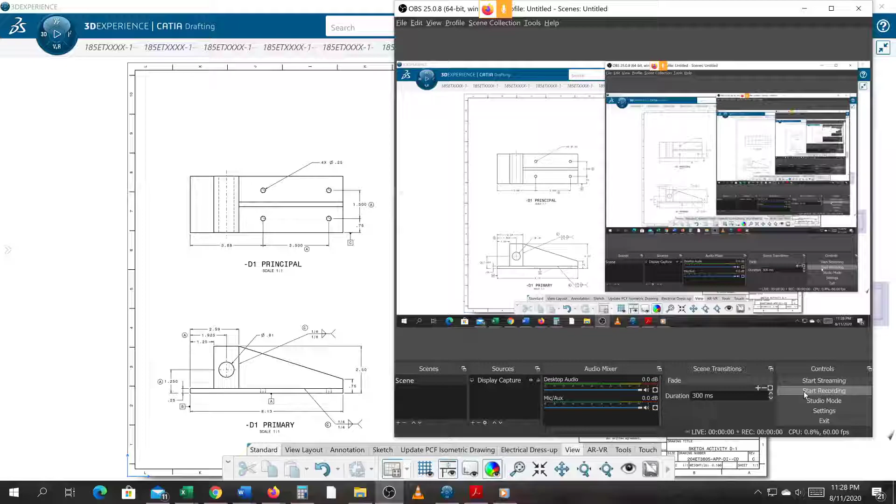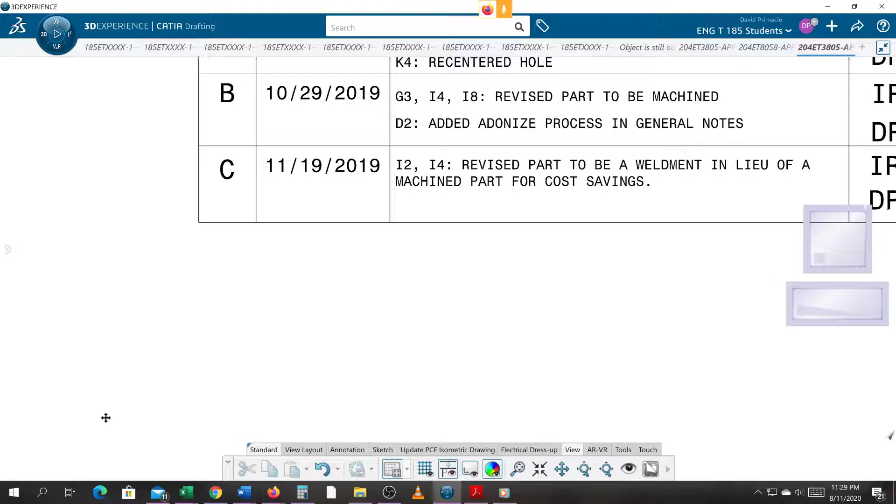After completing revision C, we decided we missed a few things, so we're changing it over to a weldment. This becomes a weldment drawing where we identify parts with a bill of material that would look very similar to an assembly drawing.

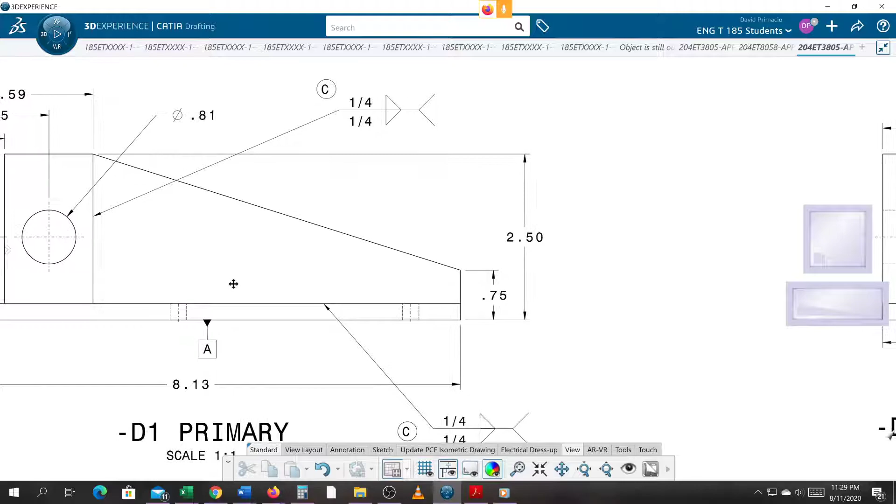So we added the 1/4 inch fillet welds. You've read through the welding section of the book, but normally when we weld something on, we would weld a stiffener or a gusset on.

The gusset would have a flat like this over here, where the 0.75 vertical dimension is. There would be a flat on top as well instead of coming to a sharp point. It'd be a lot easier if we just had a flat gusset coming out here.

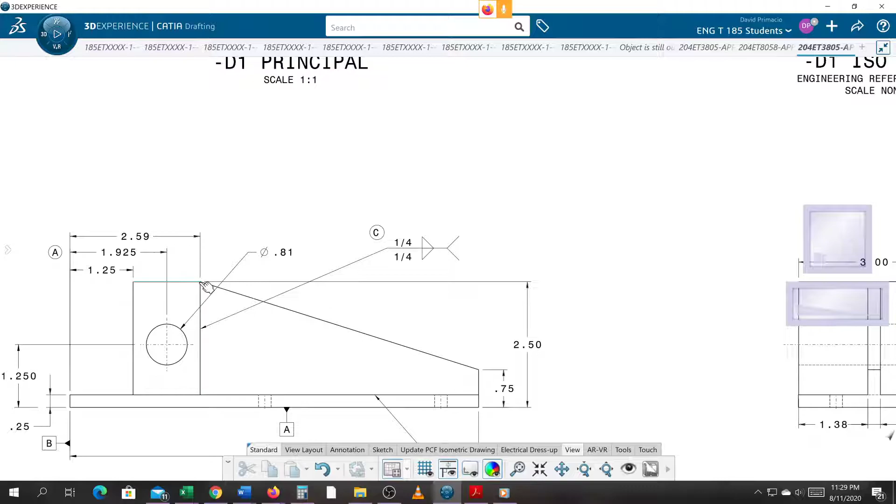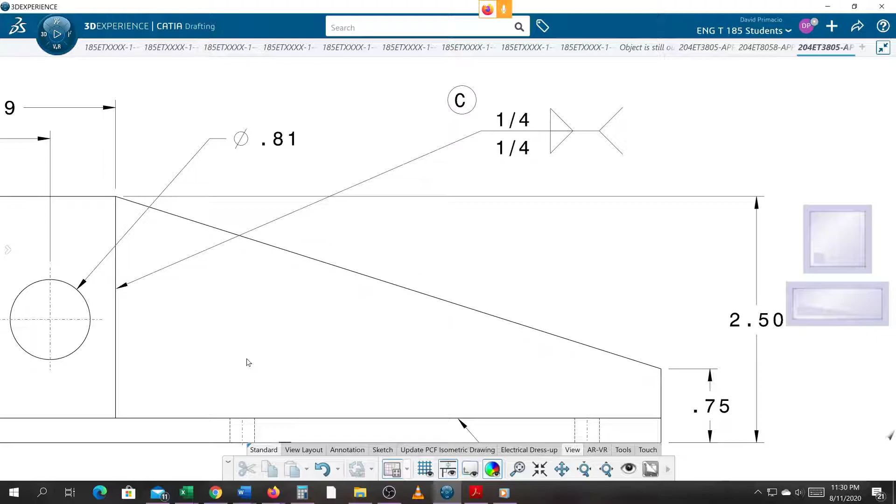Now that means this piece is a welded piece. This gusset welds onto this other piece here. If that were the case, those are two separate pieces being put together at one time, making it a single piece. So unlike an assembly, it won't come apart once we've done the weldment.

So on a weldment drawing, you typically dimension the part and the actual assembly all in one drawing instead of making different detail drawings.

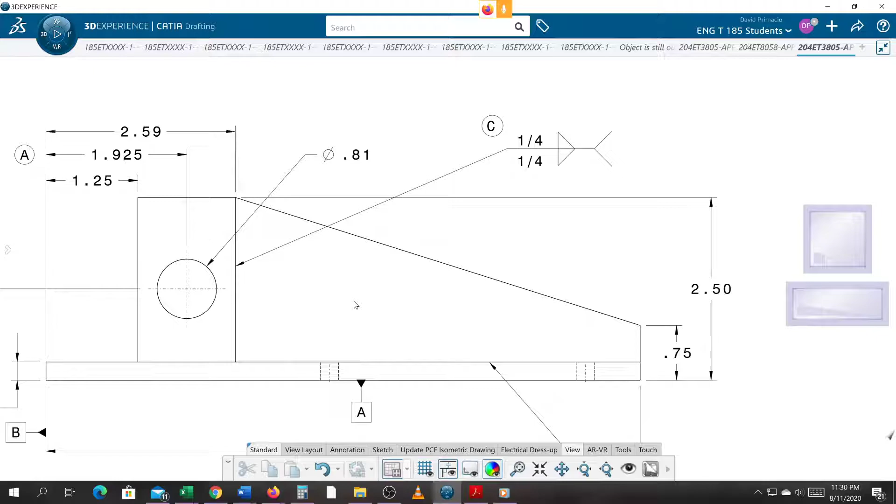So this would become a weldment primary view, and this flat here would be called off, but you'd also have to call off the individual parts. Let's take a look at one.

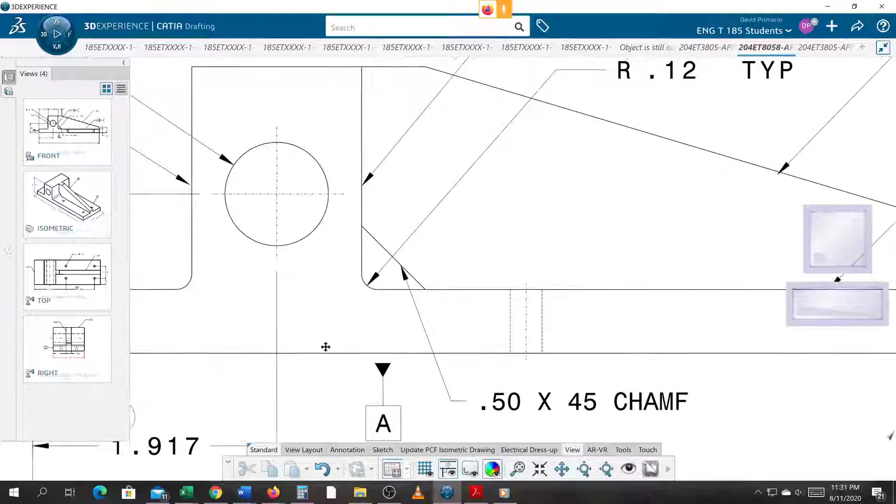You have your fillet welds, which were supposed to be 1/4 inch, and when I go to machine the block on the bottom, the end mill would leave a fillet over here and over here, so you'd have an 1/8 inch fillet in these corners, 1/4 inch fillet, whatever fillets you use.

Now, the only problem is this gusset - if you were to draw that gusset and try to get it in there, it's going to have that square notch and it's not going to fit in the radius. So we've got to chamfer off this edge so we can easily slide this up and fillet weld it on both sides.

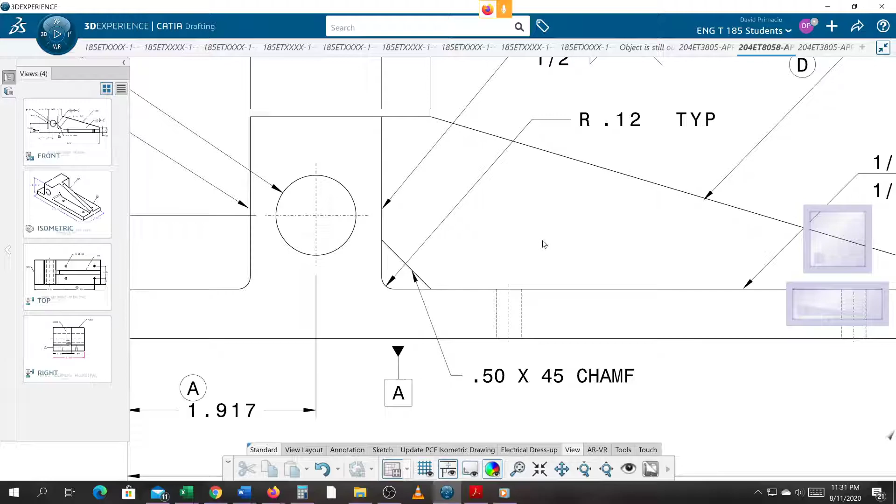So you'll have to add in a chamfer here, radius that part that we're going to machine out, and then weld this stiffener gusset onto it.

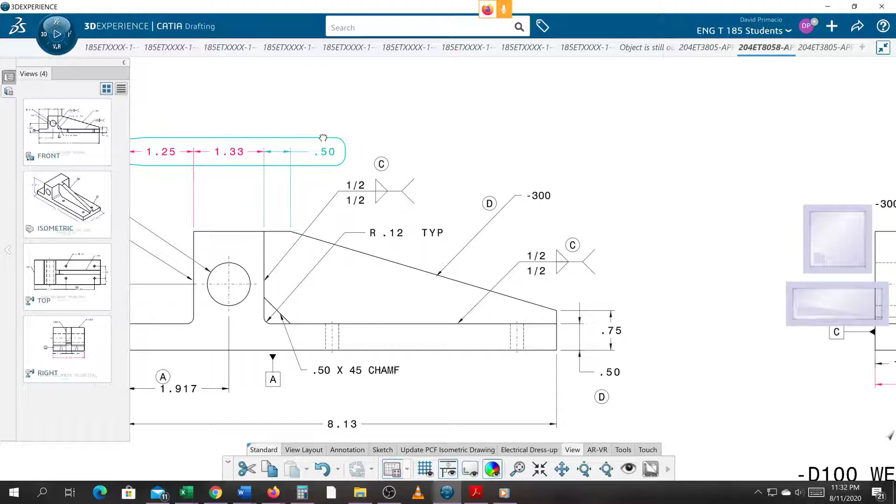This is actually not correct - we want to make this flat up here. That 0.5 dimension here should be the same as that line right there. That should be 0.5 as well. We'll make them equal for a stiffener.

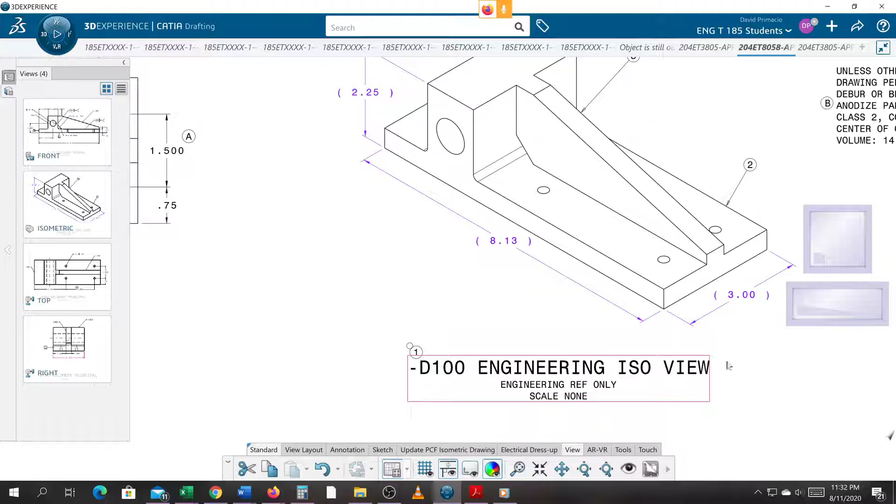And this becomes - let's make this a 100 here, because now that it's a weldment, it's a lot easier to have numbers rolling in and out if you go to the 100s instead of starting at 1 and counting to 10.

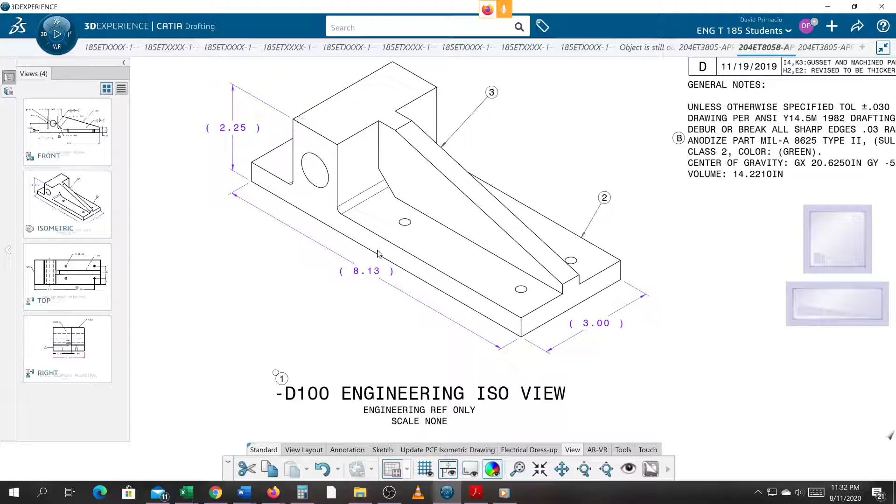So you want to start off with the dash 100 - this is the weldment itself. Then dash 2 will be the base piece, and dash 3 will be the stiffener that we weld onto this with the 1/2 inch fillet weld.

So you want to call out all the changes we're making for the final change to revision D. This general note is supposed to be above the title block. This bill of material is normally above the title block, but I would allow it to go down here below.

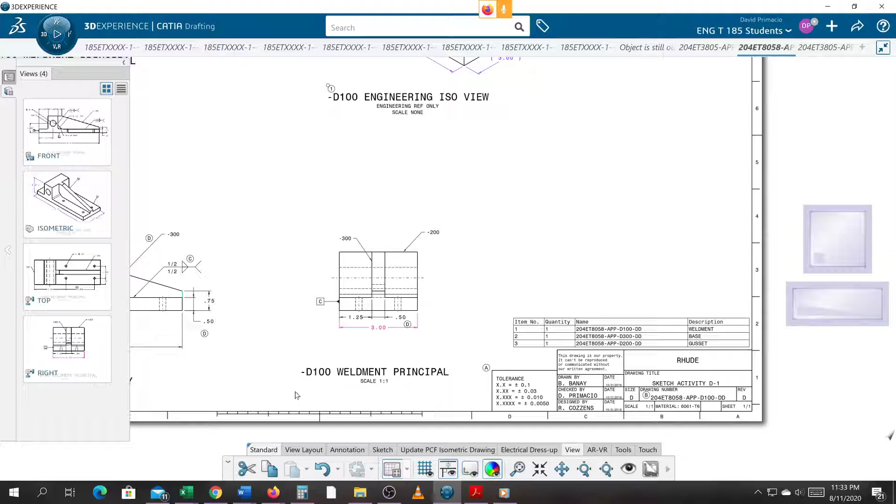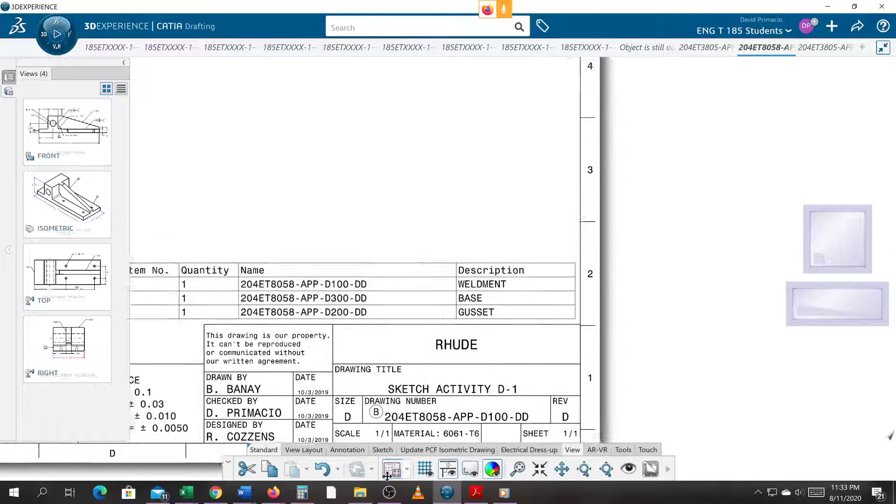This is an ANSI drawing, so if it's an ANSI drawing, we want to make sure we have two-place precision on our dimensions, and we're calling off the parts.

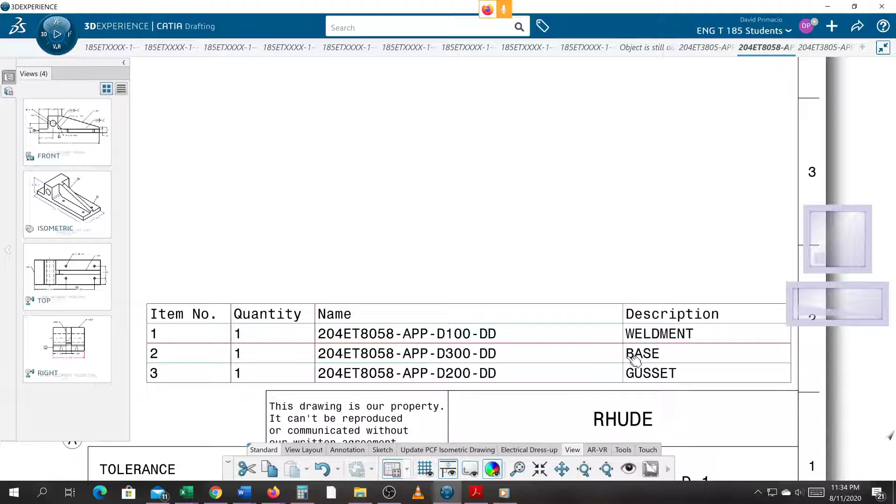So this is the dash 200, the dash 300. The dash 100 is the weldment itself. The dash 200 really should be the base. The dash 300 would be the gusset.

If it labels it that way, it labels it that way. I'm not too worried about it.

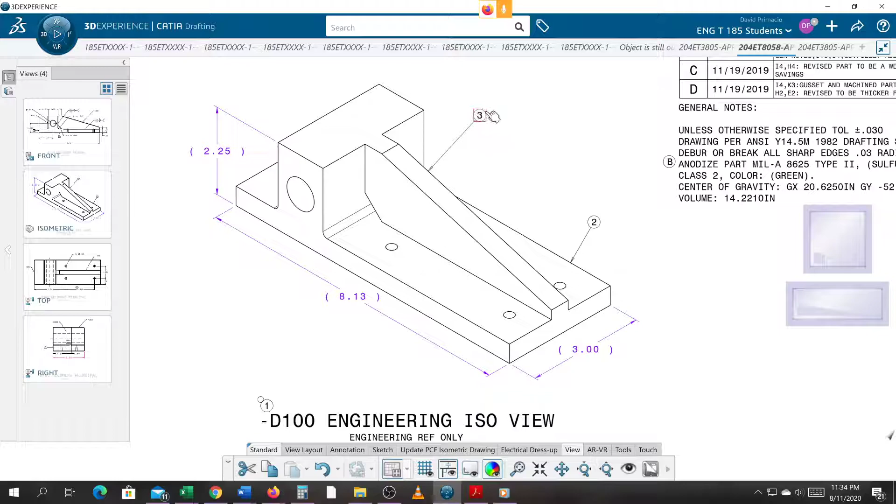So we have to balloon. The first balloon here is for the ISO view, the weldment. This balloon is for your base. This balloon is for the stiffener, which actually didn't look right now that I'm thinking about it.

The base would be the 200, and the gusset would be the 300, because he's calling this number 2, the gusset number 3.

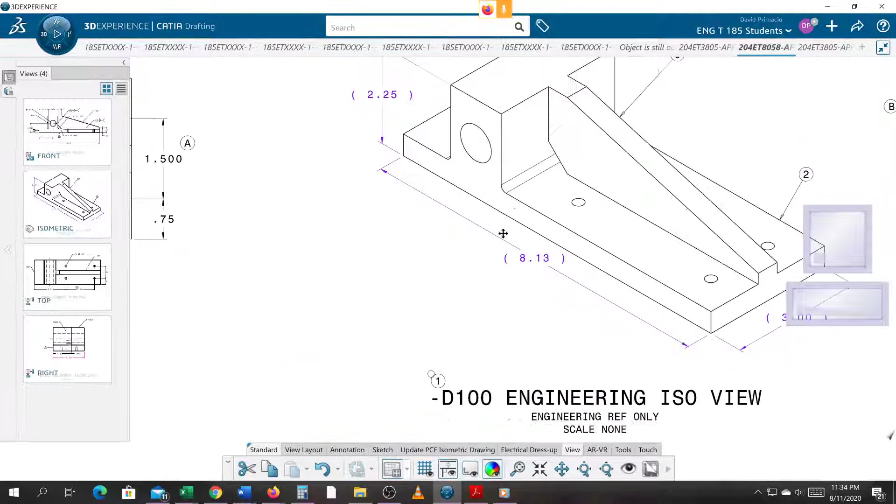At which point you would have to call off the dash 200 and the dash 300 on each of the 4 views. It's ballooned one time and then labeled off on all the other views. Read your assembly chapter in the print reading book for clarification.

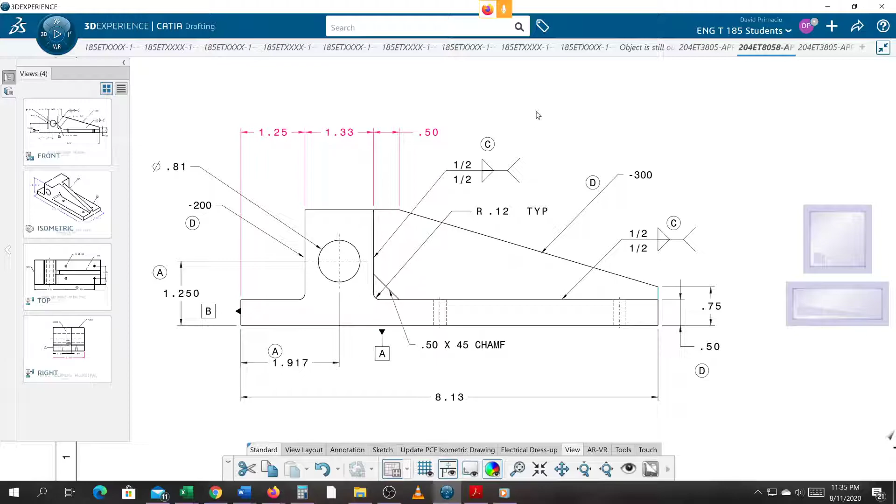So here's your dash 200, here's your dash 300. You've got the Rev D here, you've got the Rev D note here. We should have a Rev D note here, Rev D note for this fillet weld. So you missed some of that.

We'd have a Rev D here and a Rev D here, a Rev D by all these balloons because we've added that - these are all new. A Rev D here and a Rev D here.

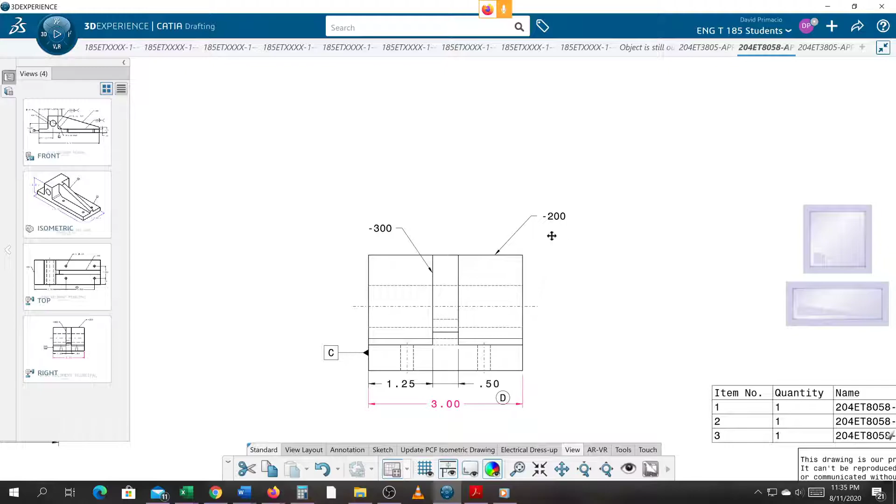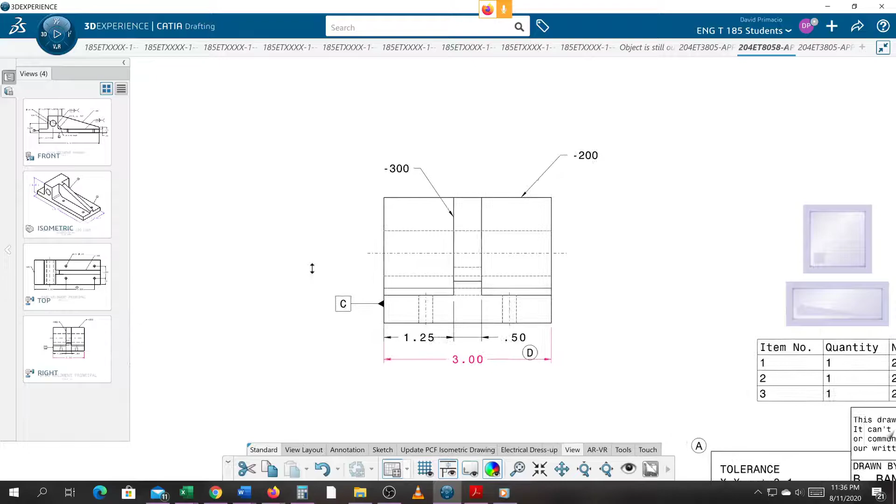And we switch the gusset from a 1/4 inch to a 1/2 inch. If we get too skinny of a part, it might just melt away on us or get warped. So we're going to thicken up the part for the stiffener, and that's pretty much it.

This will be the final drawing, final revision, so you'll have a nice drawing, being able to illustrate to others, hiring managers, that you've done revision drawings. You can show them that you've got this down.

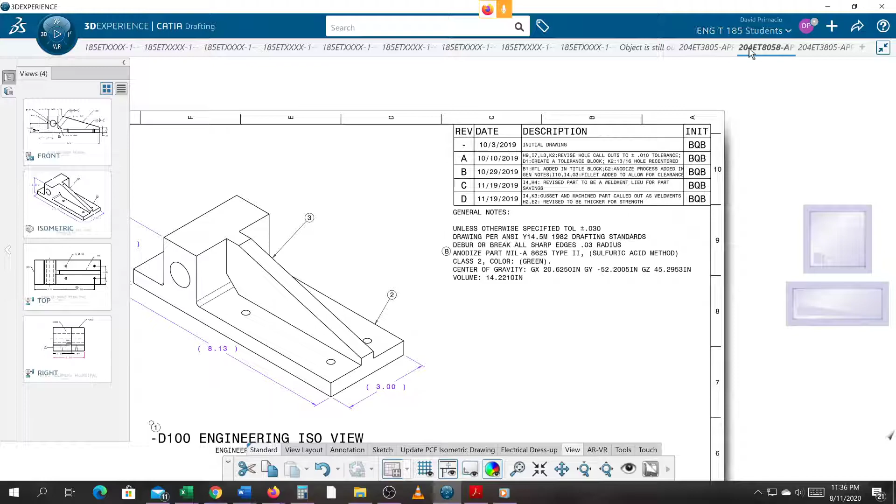Remember, what we're supposed to do is add your initials now, make this a little bit bigger, but you'll have a reference that people can see that you're actually learning how to do drawing revisions, which would be the first thing you get to do when you get a job.

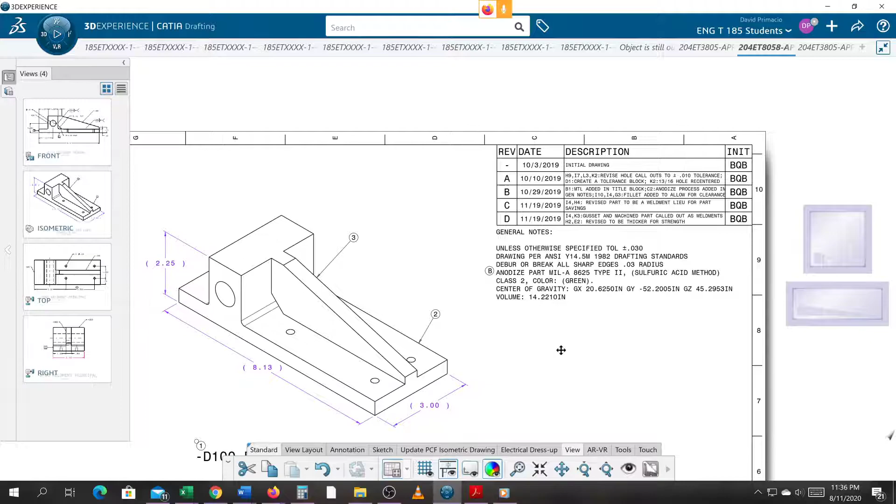Alright, hope this helps get this piece built and done. With it being the final version, we'll need all our checklists complete.

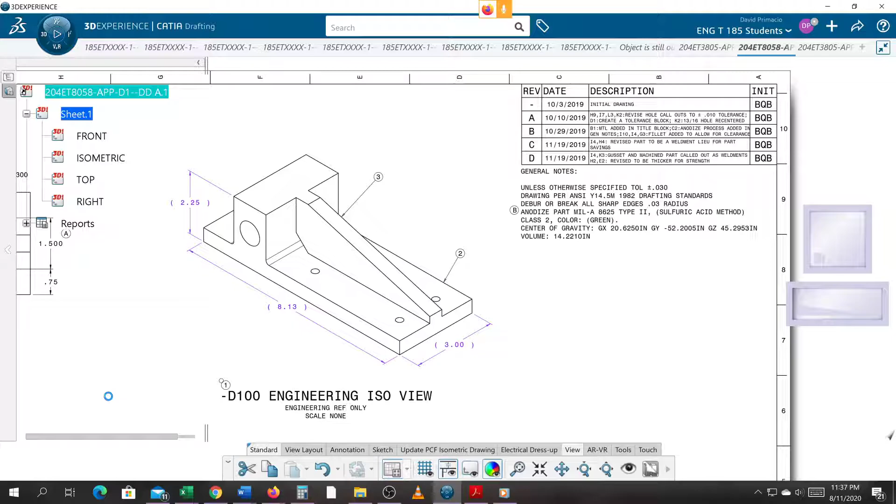The only other thing I didn't mention - when I open the 3D data, this is most likely an assembly because we started it off as an assembly. But in reality, it would have to be a detail.

So this is pad 1, this is pad 2, and then your holes and your pattern of your holes.

And the more common technique would be to create a new part body, and then you add that part body into it. So you probably have an assembly again, so just leave it as your assembly. I'm fine with that.

I just want you to be aware, if you went to a tooling group and you are doing weldments, you normally do not separate the pieces like assembly pieces and then put them together, because the weldment will be welded together, and once that happens, they don't come apart.

So we leave it in its final state in a single drawing rather than an assembly drawing, which in some ways is easier to manage. So I think it's a good technique to practice and learn.

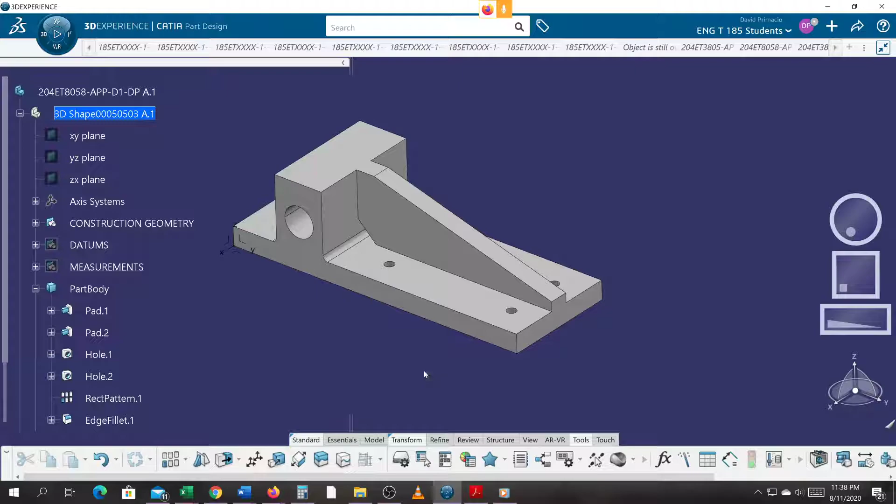That concludes this demo for the final revision for your weldment drawing.